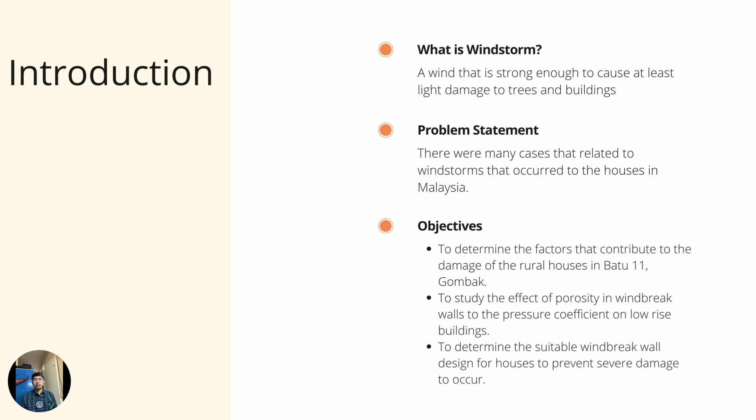So for the objective, there are three objectives: to determine the factors that contribute to the damage at houses at Batu 11 Gombak; to study the effect of porosity in windbreak wall to the pressure coefficient on low-rise building; and last but not least, to determine the suitable windbreak wall design for houses to prevent the damage from occurring.

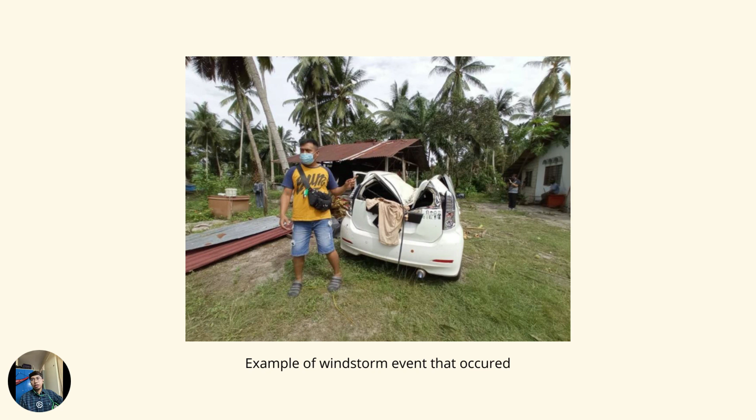This is the incident that I mentioned before in Kota Tinggi, Johor. The damage is really worse. So we move on to literature review.

There are four factors that affect the windbreak wall design. First is the height of wind barrier. According to Bitok et al., as the wind barrier height increases, the wind velocity decreases significantly. However, this situation is a little different with the porous windbreak, where no difference in velocity reduction is found.

The second one is the orientation of the wall. From the study, Sanki used the shark fin design, and found that the wind velocity is reduced significantly while using the bionic skin denticle panels design, for all wind orientations, whether X direction or Z direction.

The third factor is the porosity of the wall. The porous windbreak walls are more effective at reducing drag force coefficient. However, according to Mohd, the porosity percentage is only maximum at 50%, and if the porosity is larger than that, it will result in an increase of drag force coefficient.

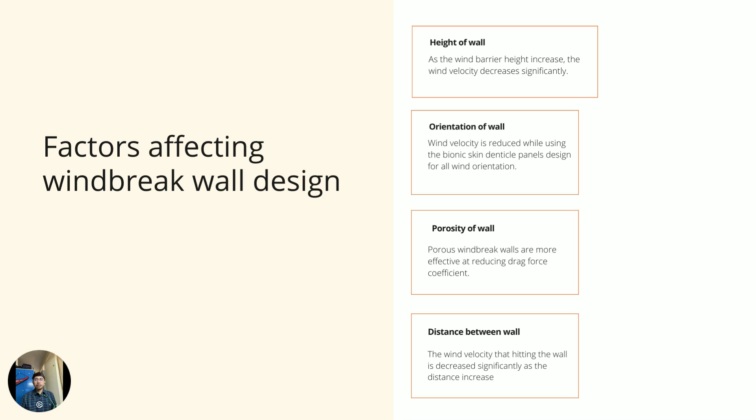So the last factor is the distance between walls. The wind velocity hitting the wall decreases significantly as the distance increases.

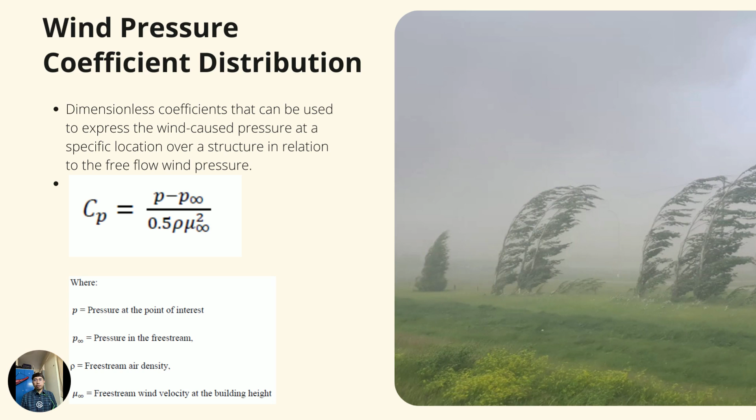We also have wind pressure coefficient distribution. Wind pressure coefficient is the dimensionless coefficient that can be used to express the wind pressure at a specific location of a structure in relation to the free flow wind pressure. This is the formula of the wind pressure coefficient.

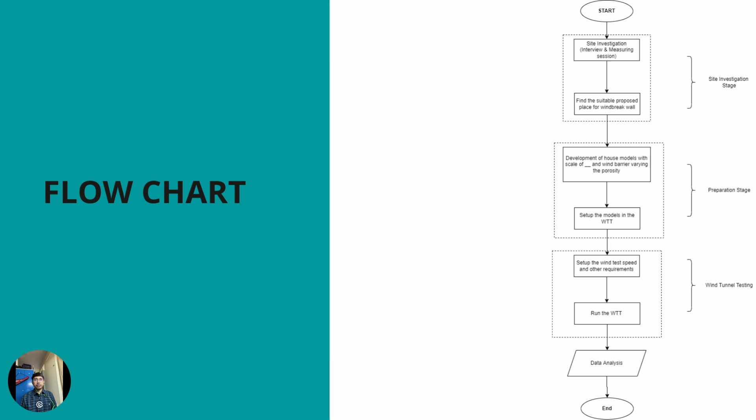So for chapter 3, which is methodology, this is the flowchart of the study. There are three parts of the methodology: the site investigation stage, the preparation stage, and the wind tunnel testing.

For the site investigation stage, we do the site investigation to get detailed and useful information regarding the dimension of the houses and the shape of the houses. We do this by distributing the survey form to the residents affected by the house damage due to the windstorm incident.

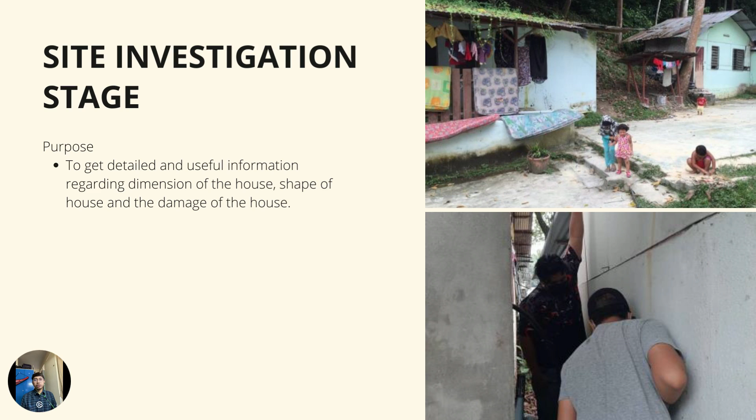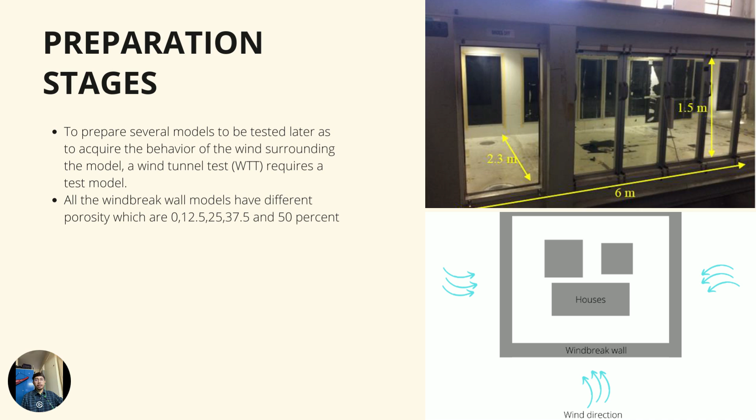For the preparation stage, the purpose is to prepare several models to be tested later, to acquire the behavior of wind surrounding. For this preparation we need a model because the wind tunnel test requires a test model. All the windbreak wall models have different porosities: 0, 12.5, 25, 37.5, and 50%. The picture on the right shows the dimension of our wind tunnel at IIUM and the illustration of the windbreak wall location, houses location, and wind direction.

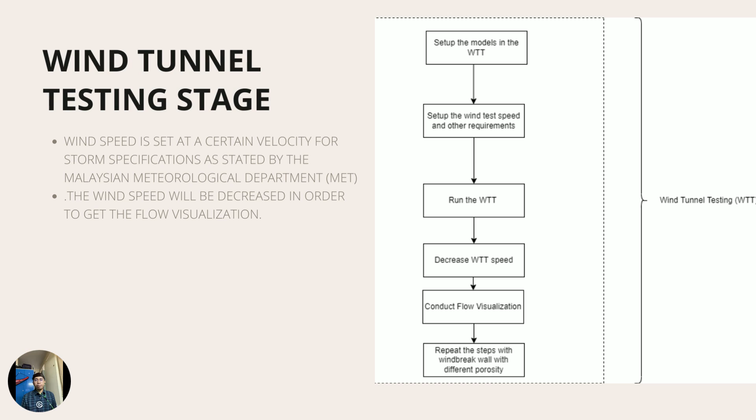For the wind tunnel testing, we set the wind speed at a certain velocity for storm specification as stated by MET, the Malaysian Meteorological Department. The wind speed will be decreased in order to get the flow visualization. The step is repeated with windbreak wall with different porosity.

So for the last chapter, conclusion and future works: in summary, not all objectives for this study are fulfilled yet. We have only achieved the first objective, which is determining the factors that contribute to the house's damage. All remaining objectives will be achieved in FYP 2 soon.